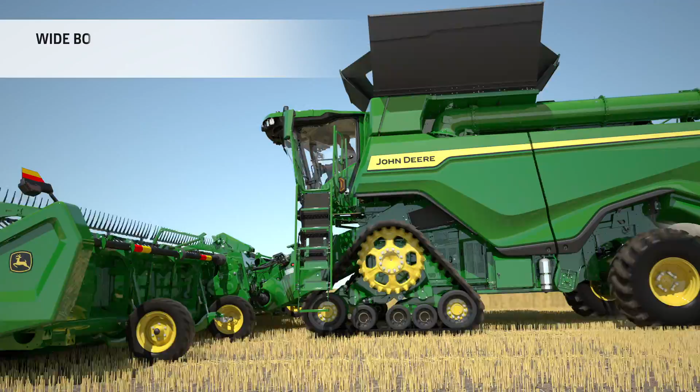High performance and efficiency, as well as excellent grain quality, are the winning factors that help the X9 series deliver the low harvesting cost per tonne that's so essential in successful harvesting operations. Let us take you on a journey to discover its innermost secrets.

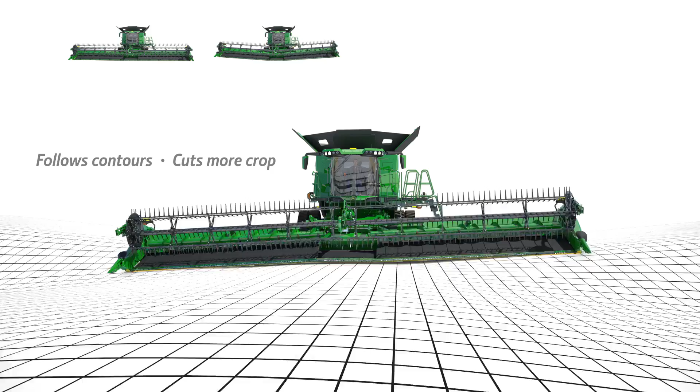The wing movement of plus or minus 10 degrees leads to better ground following and better crop capturing. The projected pivot point technology of the wings enables a tighter reel cutter bar relationship throughout the entire wing range.

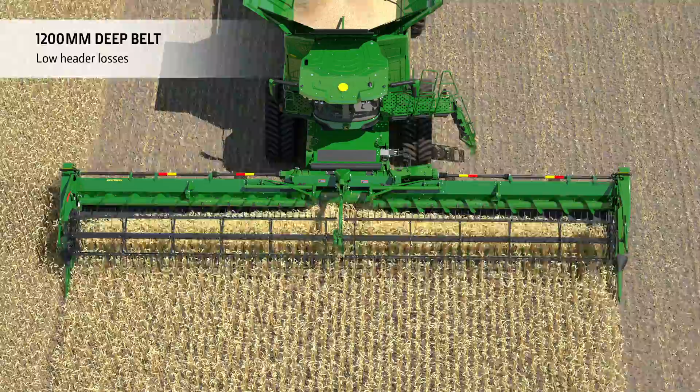Wide grain saver belts help to minimize losses in small grain crops like rapeseed to a minimum. The crop is fed head first with support in bushy crops from the fingered auger into the wide feeder house opening.

Hydraulic fore-aft tilt control lets the operator adjust the angle of the feeder house on the go for faster harvesting in down crops.

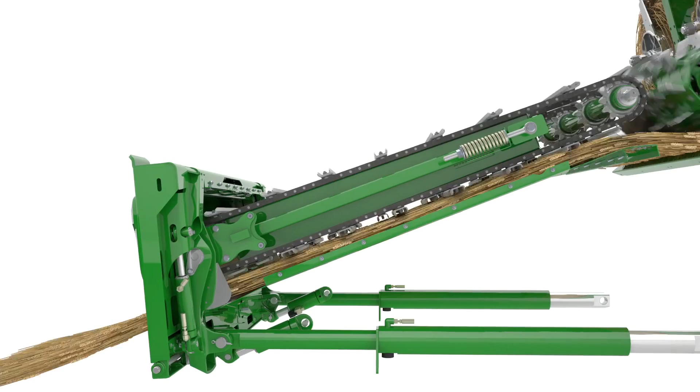The mid-floor pivots to allow more space for high-volume crops. This ensures better crop engagement and a smoother transition through to the rotors.

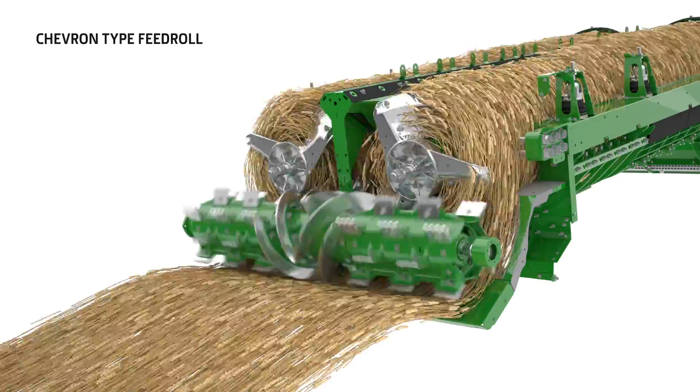The 8-wing feed accelerator features a chevron pattern. This makes sure that the crop stream is gently pulled apart for an even feeding of the crop into the 2 rotors.

Vanes on the front of each rotor ensure a smooth transition of the crop mat into the axial movement and fill the rotors as quickly as possible.

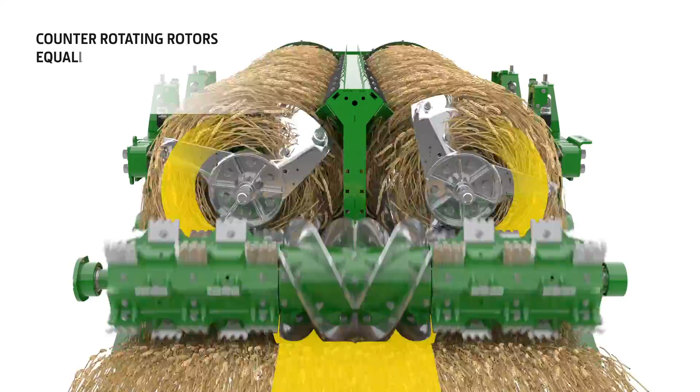Also, due to the counter-rotating rotors, the crop mat is divided without any sharp change in direction. This preserves the straw quality and reduces power and fuel consumption.

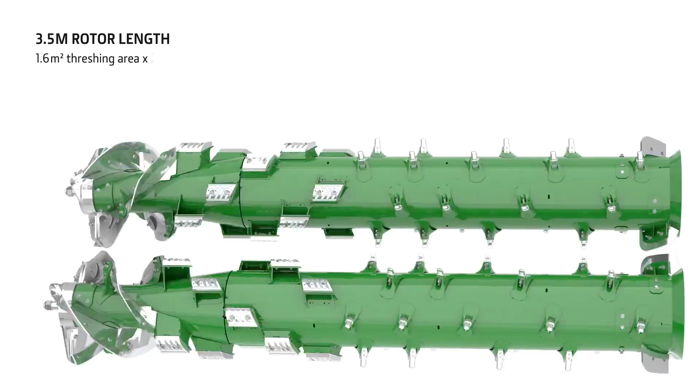The proven rotor design with its feeding, threshing and separating zones is carried over from the S-Series. The crop does 9.5 revolutions in the 3.5-metre rotor, which offers a massive active separation area. The prerequisite for high performance.

The crop passes approximately 2.5 times over the threshing concaves, which adds up to a massive threshing surface area.

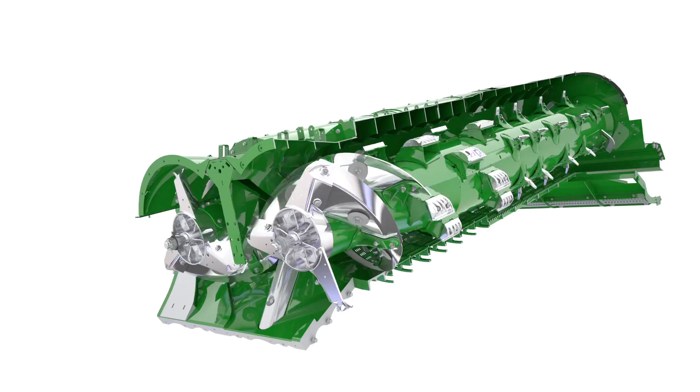The eccentric shape of the rotor housing with more space at the top creates a pull and release effect as the crop rotates, compressing at the bottom and then releasing at the top. This moves the grain to the outside of the crop flow where it is separated more easily.

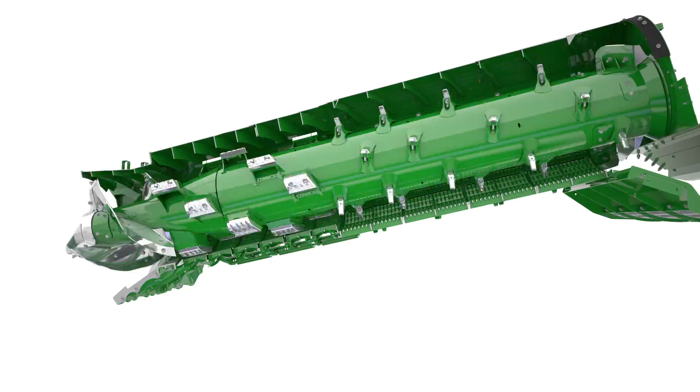In high-yielding and high-moisture crops, active concave isolation boosts performance further by maintaining a consistent concave clearance.

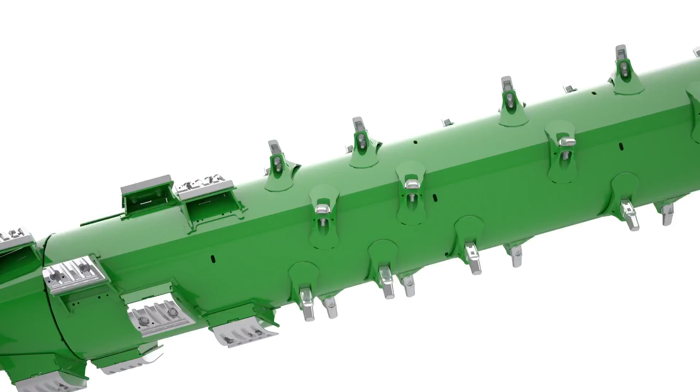In the separation area, the crop passes the separation area 7 times, offering a massive separation capacity to cope with tough and wet small grain conditions. The large fingers spaced in a special pattern on the rotor enhance separation, allowing any trapped grain to escape.

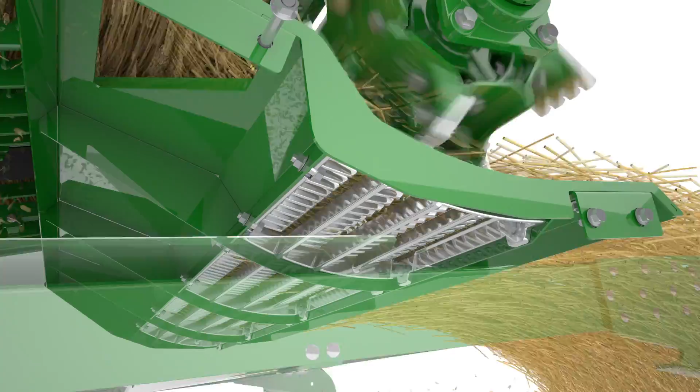There is even an additional separation area under the discharge beater to remove those last few grains. A return pan catches all grain from the rotor and returns them to the front of the cleaning shoe. This ensures all materials pass over the entire cleaning shoe area, reducing grain losses even further.

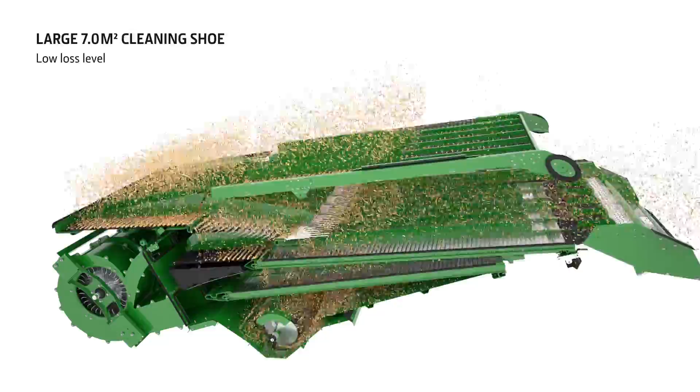The all-new cleaning shoe offers 7 square meters of cleaning shoe area for a superb grain tank sample and a minimum amount of losses. Grain moves from the preparation pan onto an inclined front chaffer, which helps to spread out the material across the cleaning shoe. It also acts as a pre-cleaner.

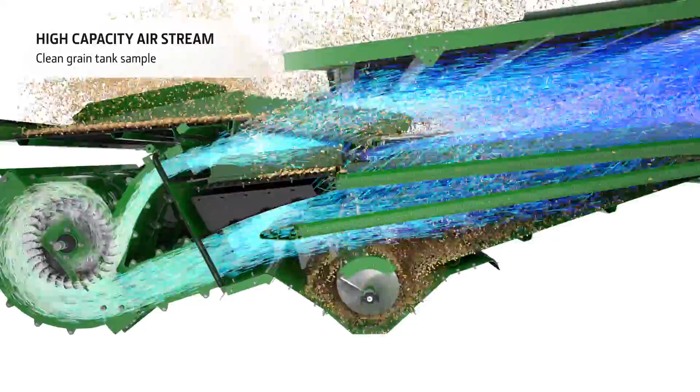The crop then passes over a large ventilated step to ensure effective pre-cleaning. 4 high-capacity fans provide a constant airflow over the entire cleaning shoe.

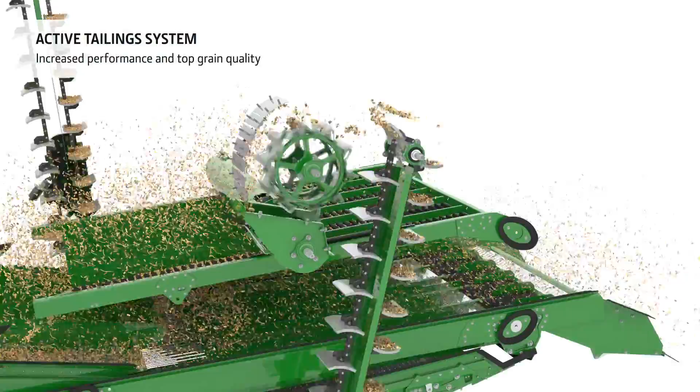On rolling fields, Active Terrain Adjust automatically optimizes the cleaning shoe settings to reduce losses and achieve a clean grain tank sample. An active tailings system with smooth rubber paddles threshes the tailings content separately, boosting performance even further without increasing grain damage.

The X9 series is also equipped with the revolutionary Combine Advisor automation technology. Cameras in the clean grain and tailings elevators continually measure the grain and sample quality.

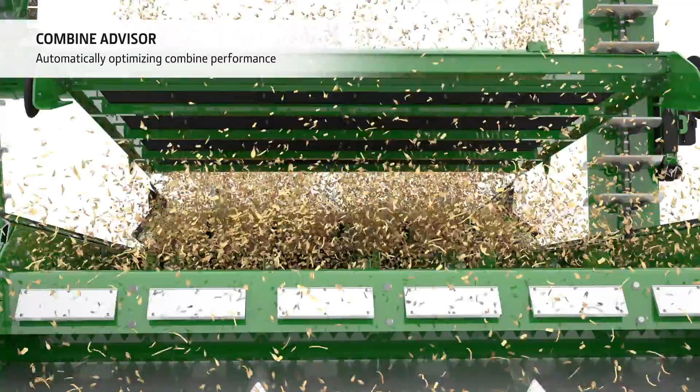Combined with sensor information about losses, engine and rotor load, this system delivers consistent output in all conditions, no matter who is driving.

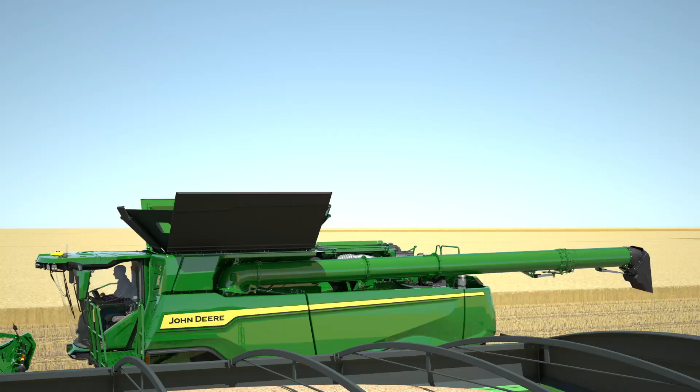The massive grain tank is designed for non-stop harvesting. And when it comes to unloading, it only takes 100 seconds to empty 13 tons of grain.

Trailer filling is easy too, thanks to the active spout which allows the operator to direct the grain flow during unloading. The large diameter auger also runs at lower speed, further reducing the potential for grain damage.

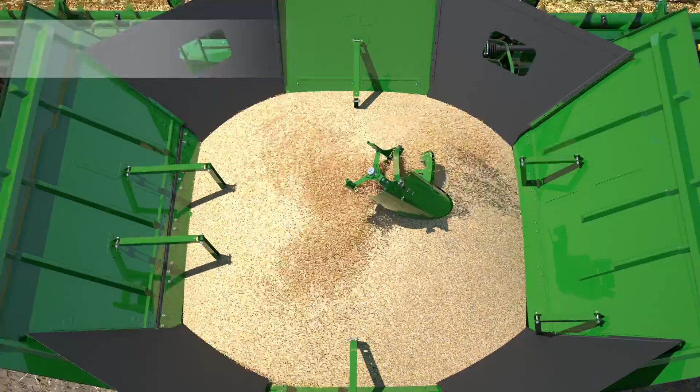The auger is fitted with a cross-auger shutoff. This system allows the operator to empty the auger without having to unload the grain tank, greatly reducing wear and tear.

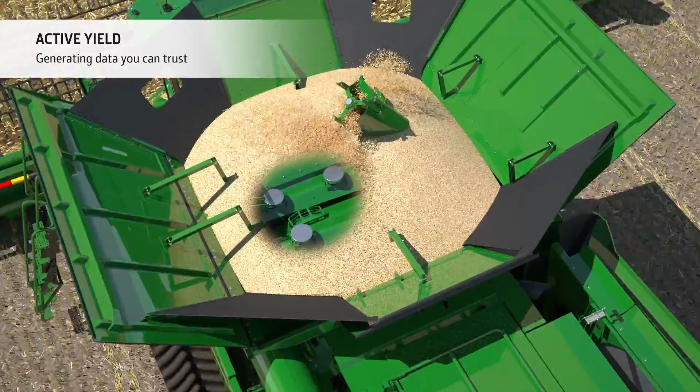Active yield sensors mounted in the grain tank calibrate the yield sensor automatically and continuously. This maximizes the accuracy of your yield maps, generating data you can trust for future decision-making on your fields.

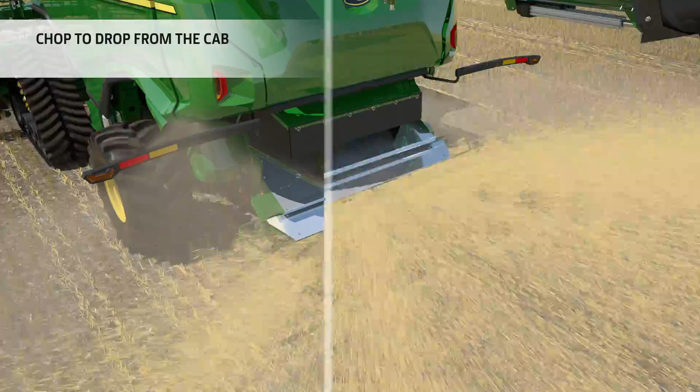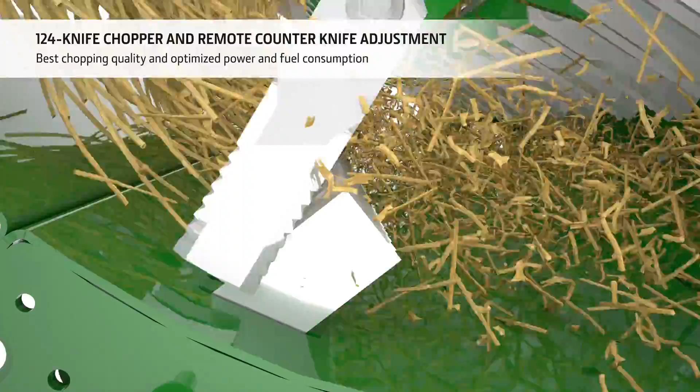For easy residue management, the operator can simply switch from chop to drop at the flick of a switch. The 124-knife chopper offers superb chopping quality, and thanks to the remote adjustable counter knives, chopping intensity can be varied on the go to match the conditions.

Mechanically driven straw spreader paddles blow the straw equally up to 15 meters wide. The X9 series, performance efficiency, grain quality with industry-leading precision ag technology.